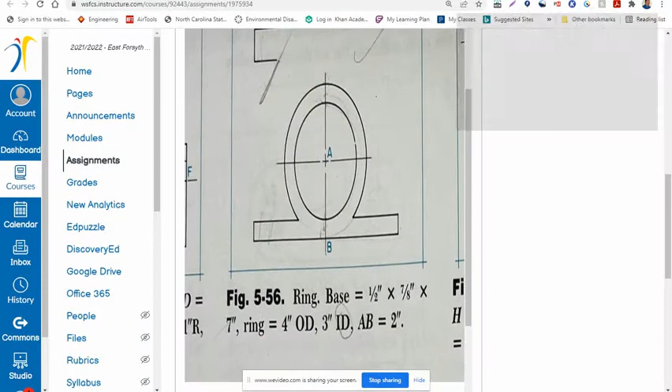All right, ladies and gentlemen, this is figure 5-56, a ring. The base is 1/2 inch by 7/8 of an inch by 7 inches. The outside ring here is 4 inches outer diameter, the inner diameter is 3 inches, and the A to B is 2 inches.

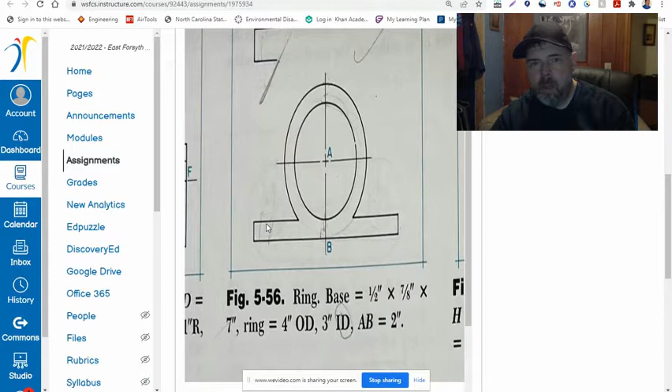We've got two views. This is your front view, and your top view is going to be a setup like this here. So let's go to the drawing.

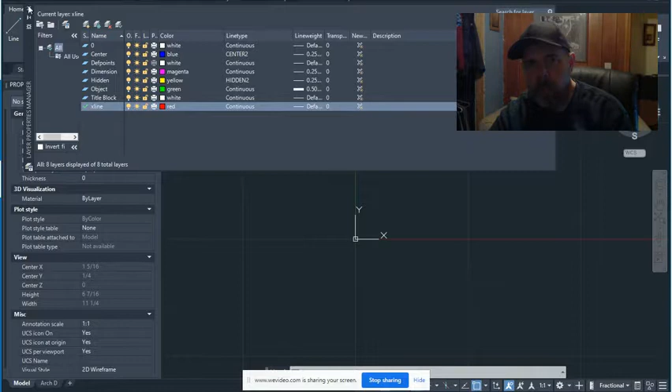I've already set up my layer properties. You've got your center lines, your dimension lines, your hidden lines, your object lines, your title block, and your construction lines. We're not going to worry about the title block today, but we'll talk about your construction lines, your object lines, your hidden lines, your dimension lines, and your centers. So all of that's going to be taken care of, just like normal.

Your units are already set. Let me hide this thing here. I want to show you the units are already set before I start drawing anything. We're set to fractional, so we'll do OK.

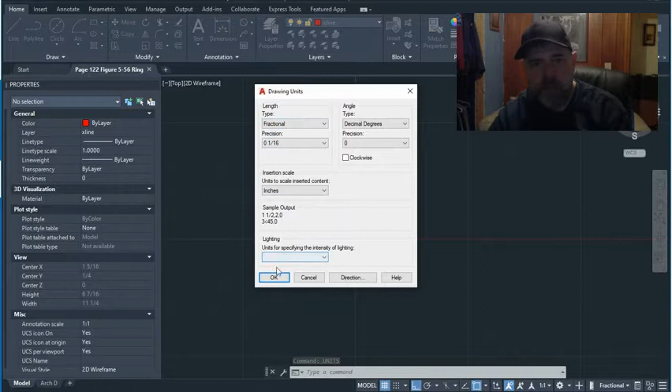So what I'm going to do is go ahead and set my xline here. I'm going to put my vertical member here.

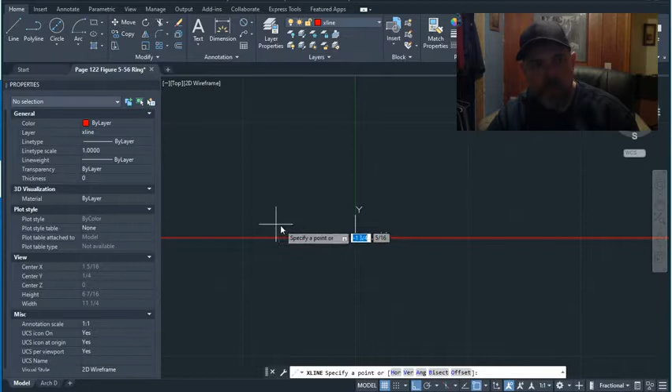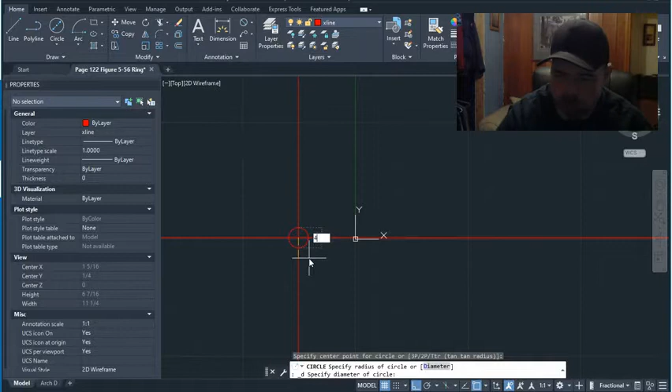Now, the first thing I'm going to do is set my 4-inch diameter right here on the center point. So, 4. I'm going to set my interior diameter to 3.

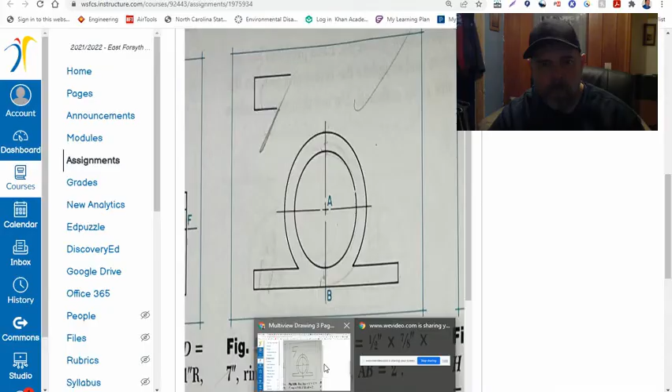I'm going to then take that line from A to B and draw it here. So I'm going to draw a 2-inch line here. We'll go this way 3.5, 3.5. I'm going to go down 0.5.

Yeah, I'm trying to hold my mouse. My mouse sensitivity is a little high. You can go all the way down 7 inches, get back up 0.5, and back over 7 inches. Be right there in the middle.

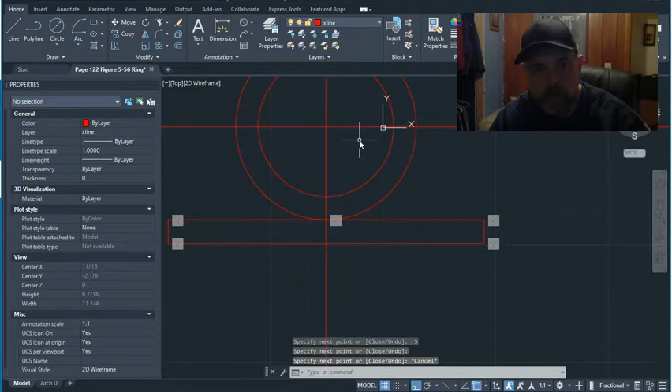Now I've got my constraints all turned on, so I'm going to go to my constraint bar settings. I'm going to clear all of them.

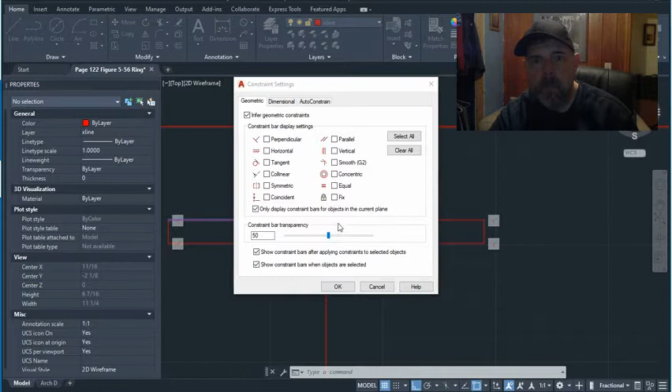All right, so now what I've got to do, one-half inch by 7/8 by 7 inches, I've got that pretty much done. Only thing I've got to do now is get this bottom ring here fixed up.

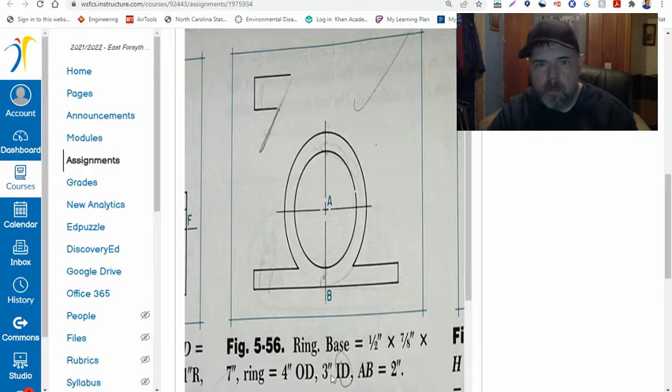And if I'm not mistaken, I drew that wrong. Yep, I did. And here's how I drew it wrong.

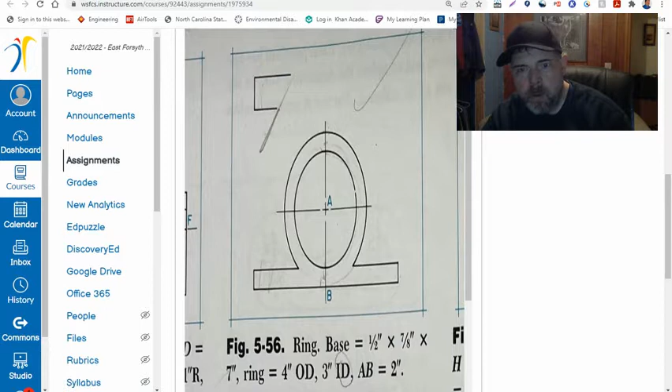A to B is 2 inches, so my 2 inches was right here. See, that's 2.5. There's my 2.

Come over 3.5. Come back up 0.5. Come over 7. Down 0.5. Take that line out, this line here.

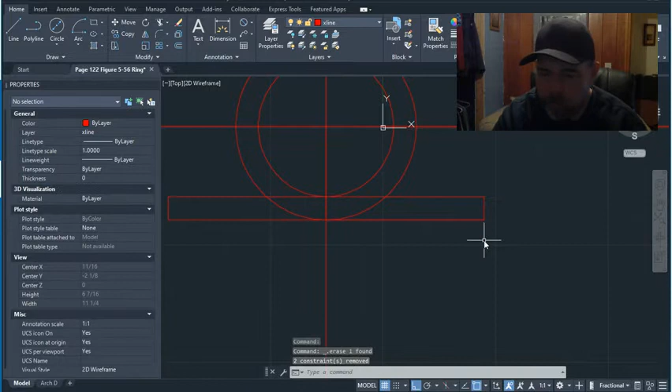Now, primarily, that's what you have for your front view.

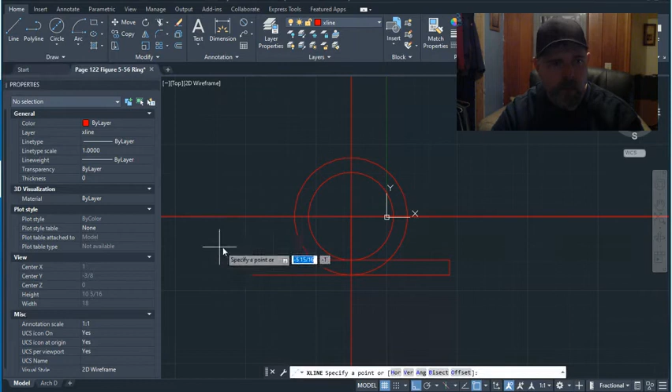And then I'm going to zoom out just a little bit. I'm going to set my construction lines going straight up. I can offset that construction line, or I could just go down here and reset it. If I offset this construction line from the center, I know I got to go at least 2 to get over here, but I need 4 to get it up where I need to get it.

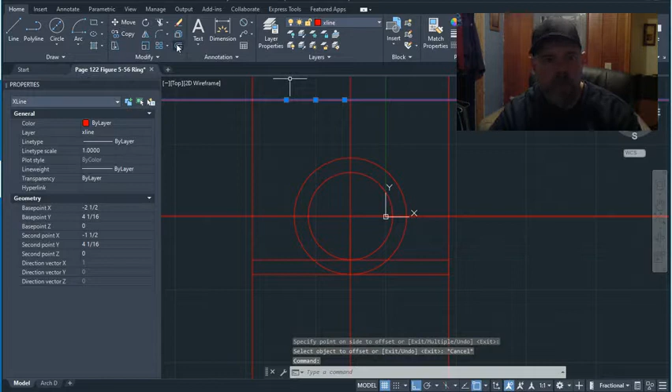And then I'm going to offset that line right there, 7/8 of an inch, 0.875.

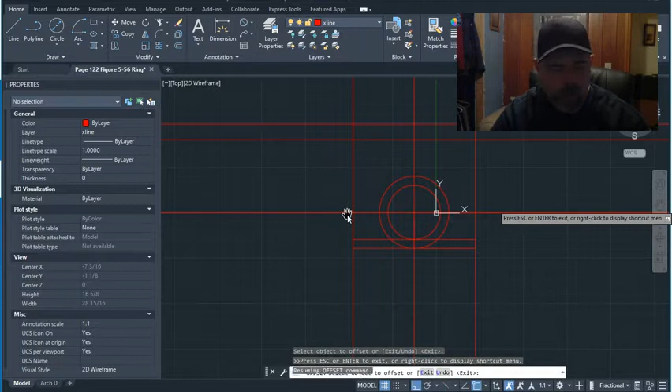Now I'm just going to block in everything with my construction lines. Remember, your construction lines, you can go up here to your draw menu and get them, or you can just type in XL on your command line or keyboard and draw them. Whichever you choose, just go with whichever's quicker for you.

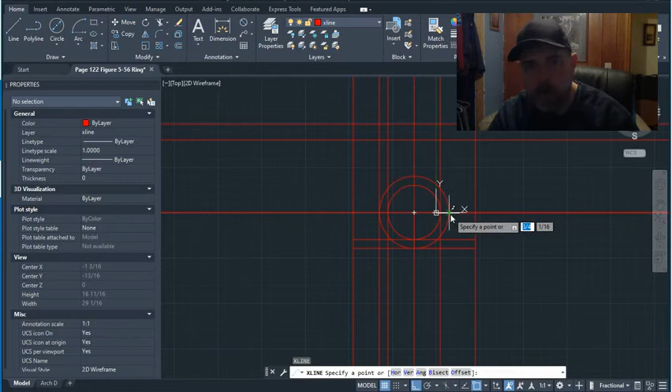Now we'll just come back and change our object line layer. Don't want to change the color, just want to change the layer. Blocking it in.

You only need 2 views for this one because your right side view is not going to be that much different than this view. This edge here is going to show up as a rectangular edge, even though it's round.

This line in here is going to show up as a hidden line. This line here is going to be a hidden line.

And we're going to offset this line here 1/4 inch, just to make it easier for us to draw with. I gotta get it backwards, I set that to the wrong side, I'm sorry. 0.25.

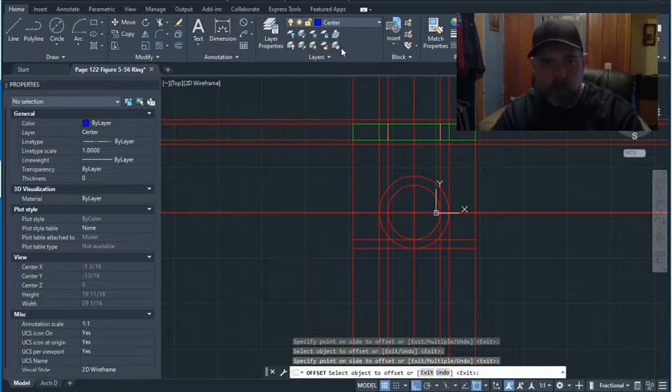And then I'm going to change to my center line. This is the reason why I draw that, I offset those lines there to make it easier to draw.

And then I'm going to change to my construction layer, my object layer. I don't want to change the color, I just want to change it to the layer. And go in and block this one out.

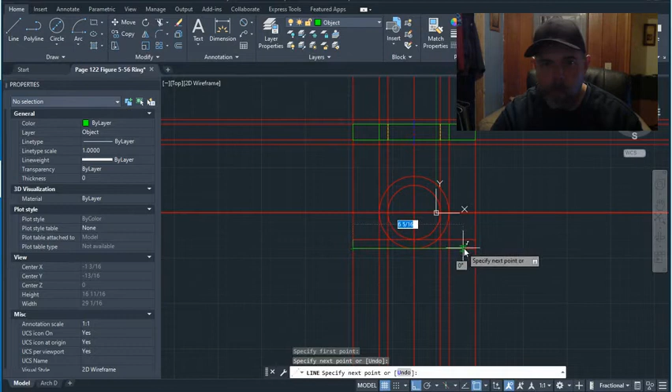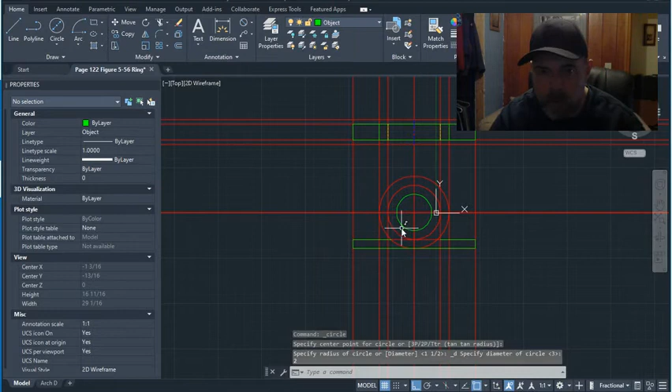Come over here, block this side in. Then get your circle tool, 2 inches. Oh, nope, inside diameter is not 2, it's 3.

And then we're going to go right here, and go up here and select my start, center, end arc. We'll start right there, center, and end. Now I got to go in here and extend my line because I did not extend it far enough out. And there we go.

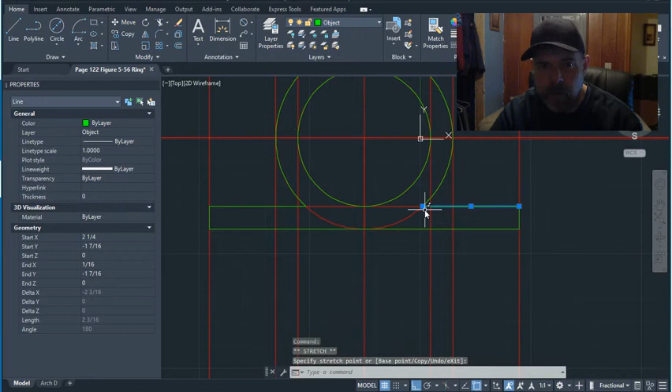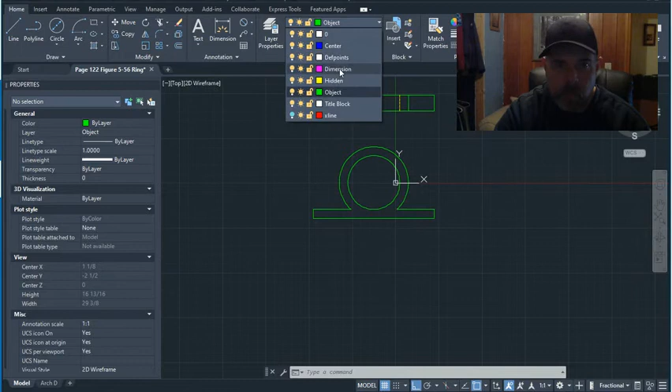And now we'll go up here and turn off my construction lines. We'll change it to my dimension layer. Dimension my...

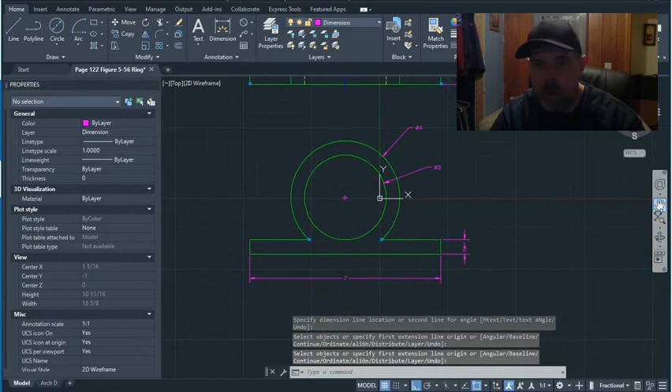I don't like the way that dimension there looks, so I'm going to change it. That looks better there.

7/8 of an inch, diameter 4. Now what I'm going to do real quick is go here and change my dimension style.

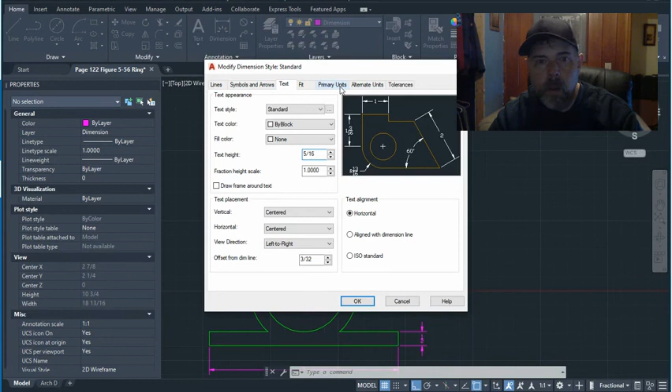DIMSTYLE. I'm going to modify my dim style. My text, what I'm going to do is change that from 1/8 to 5/16. Make sure my primary units are still set to fractional. OK, and close.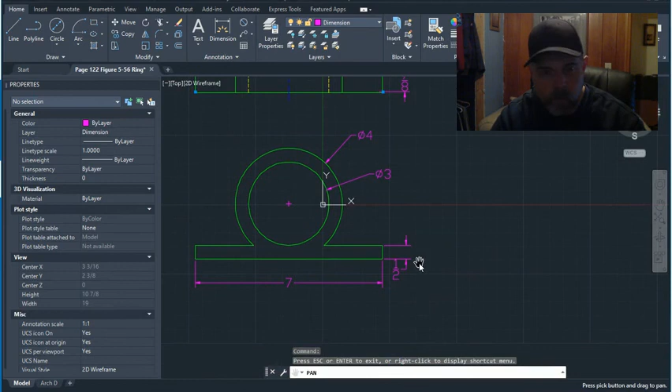Get my hand tool, which is also my pan tool. Hit escape. Move that out just slightly. Give that plenty of room where you can see that dimension.

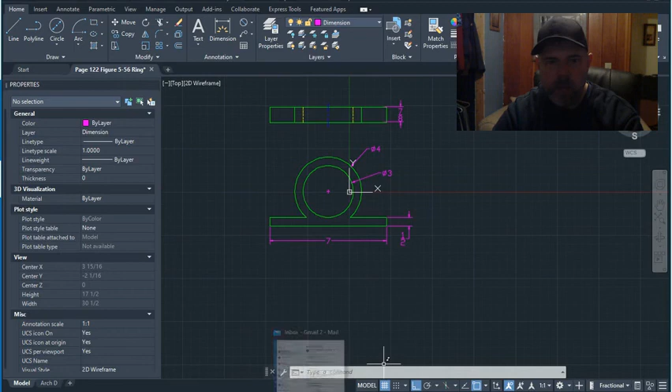Diameter 4, diameter 3, 7 inches, and we got 7/8 this way. Any questions? I'll be standing around helping you guys out. So let's get to work.